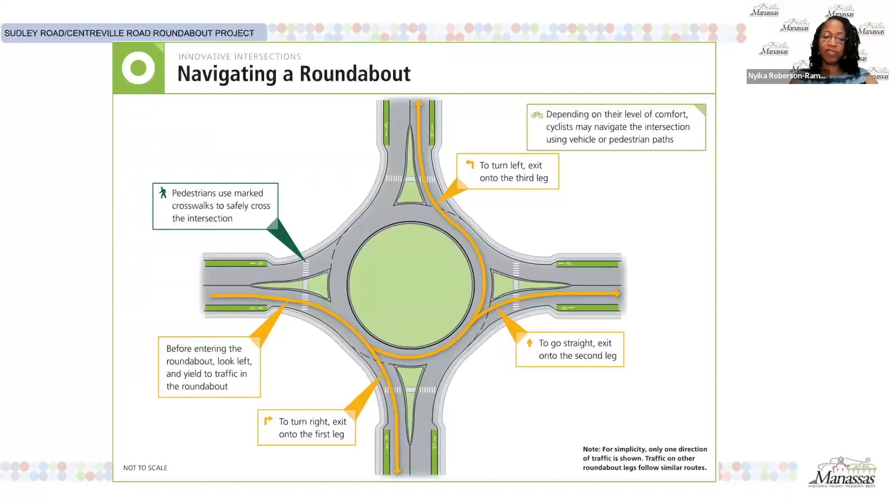First, what is a roundabout? A roundabout is a circular, unsignalized intersection where traffic moves counterclockwise around the central island. This means fewer stops and delays, safer speeds, and safer pedestrian access.

This roundabout was first proposed in the original Mathis Corridor Sector Plan adopted by City Council in 2006, which will reconstruct Mathis Avenue from Sudley Road to Liberia Avenue to a 2-lane facility with dedicated left turn lanes. After many incidents, accidents, and extensive traffic congestion, the city completed an extensive traffic study and feasibility analysis, which determined that a 2-lane roundabout would be the best improvement for the Sudley Road and Centreville Road Prescott Avenue intersection.

Roundabouts reduce the number of crashes and enable pedestrians to cross one direction of traffic at a time. Roundabouts are not dependent on electric stoplights, especially during a power outage, which makes roundabouts very resilient and efficient.

The proposed roundabout will also benefit the Mathis Avenue Improvement Project by increasing traffic capacity at the Sudley Road Centreville Road intersection.

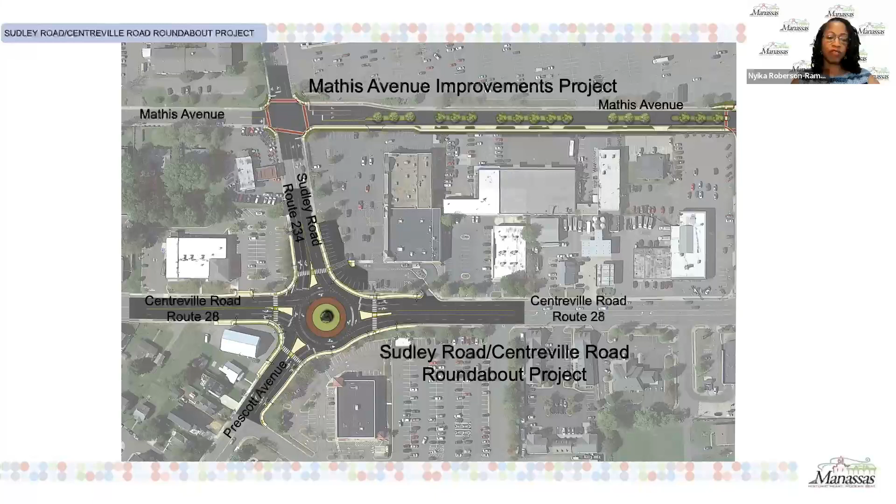The proposed roundabout is located at the Sudley Road Centreville Road intersection and will have 2 lanes in each direction, 6-foot wide sidewalks, pedestrian curb ramps, crosswalks with flashing beacons, and refuge islands at all 4 corners, and improved street lighting. Studies show that the proposed roundabout would get every vehicle through the intersection 30 seconds faster than the existing signalized intersection during peak hour travel times.

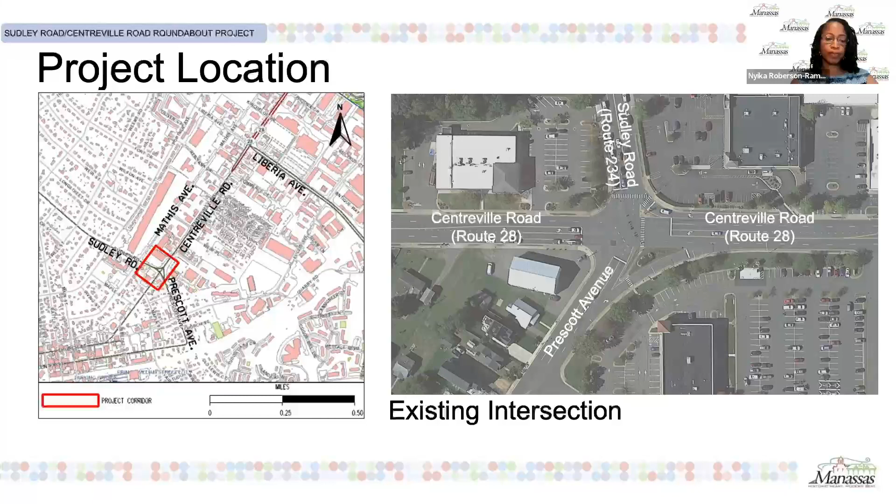This roundabout would be the first multi-lane roundabout in the city of Manassas and will be a hallmark gateway between the Mathis Avenue corridor and historic downtown.

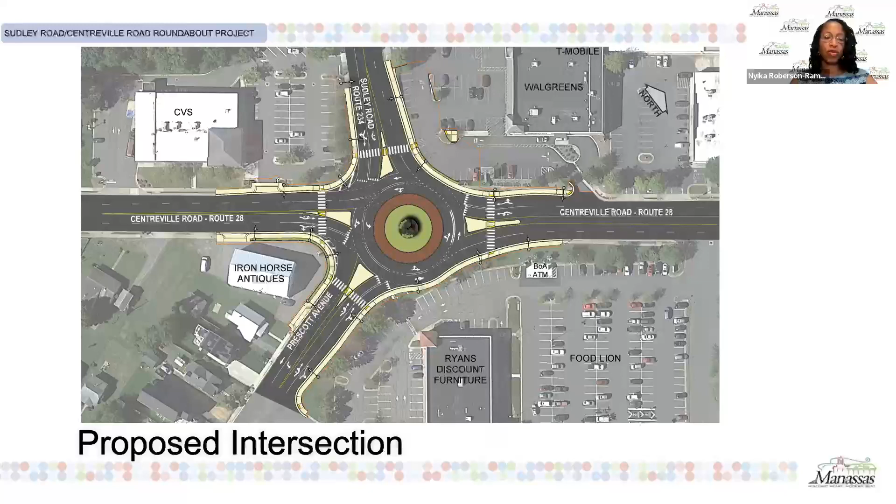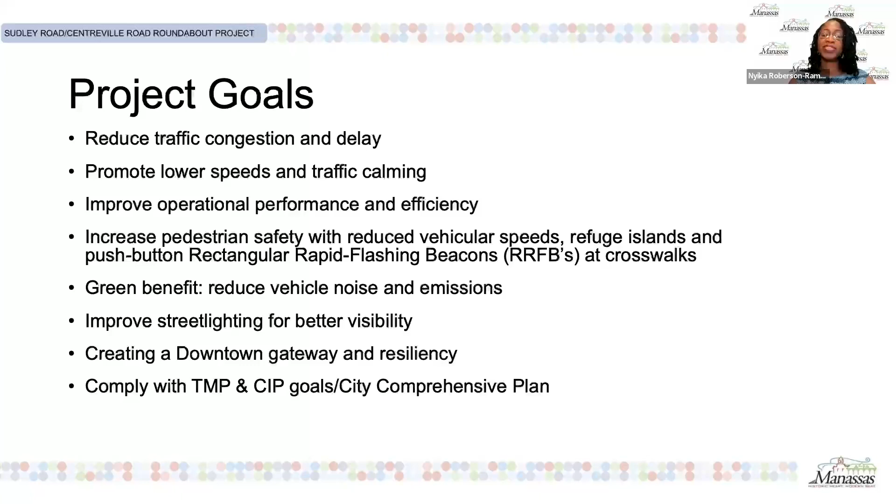Project goals are to reduce traffic congestion and delay, promote lower speeds and traffic calming, improve operational performance and efficiency, increase pedestrian safety with reduced vehicular speeds, refuge islands, and push-button rectangular rapid flashing beacons at crosswalks. Green benefits will reduce vehicle noise and emissions, improve street lighting for better visibility, and create a downtown gateway and resiliency, and also comply with the City of Manassas Transportation Master Plan and CIP goals per the City Comprehensive Plan.

Please know that if we stay with the existing signalized intersection, the mentioned benefits will never happen. The proposed roundabout will move traffic through the intersection faster and safer and is a far more superior improvement to Route 28.

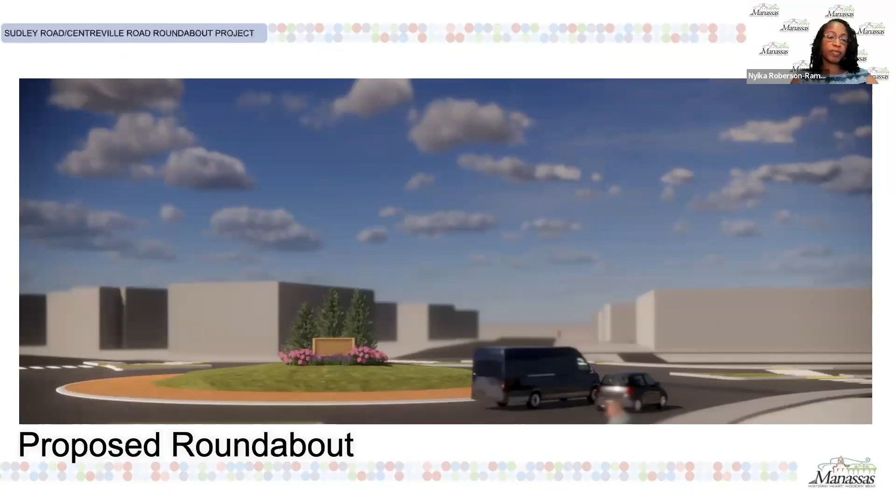First, I'll go over the environmental investigation and documentation. No hazardous materials were found at the site. There were also no impacts to wetlands or parks. And there are also no impacts to threatened or endangered species, and no historic properties will be affected by the project.

We've put together the draft environmental documentation, and once this receives federal funding, we will then need to produce a NEPA document, and it will be at the lowest level of NEPA documents, which is a programmatic categorical exclusion.

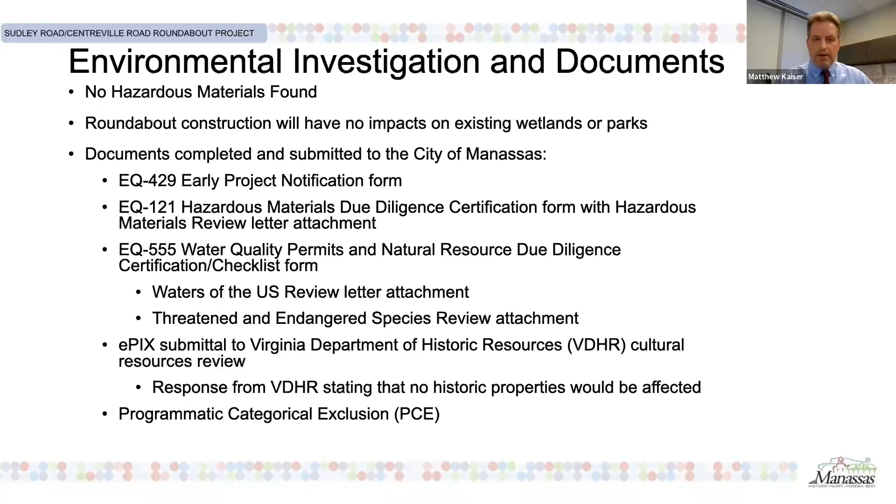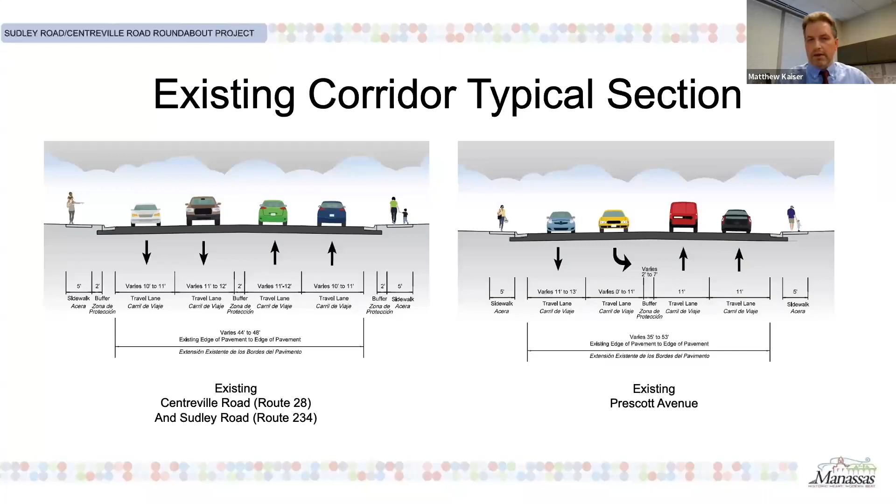This is the existing typical sections. We have Centreville Road and Sudley Road with 4-lane undivided roadway and central turn lanes. And then we have the existing Prescott with 2 lanes going eastbound, and then the left turn lane at the intersection, and 1 lane going right and through at westbound.

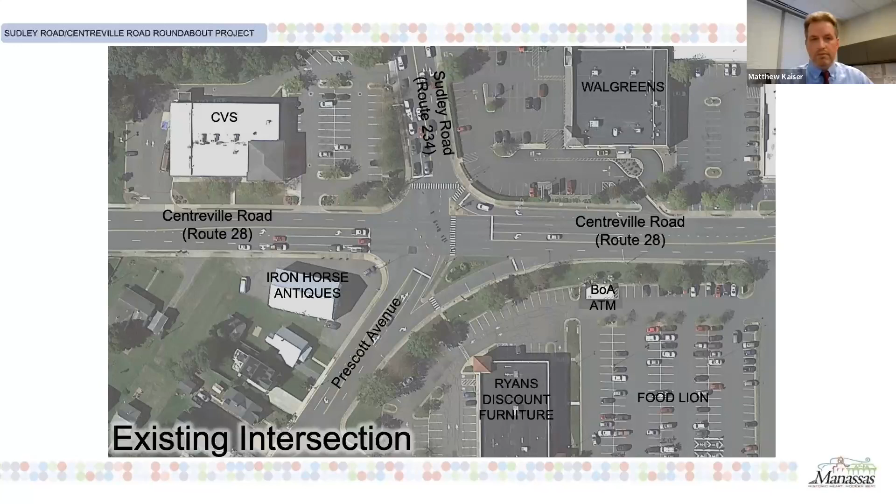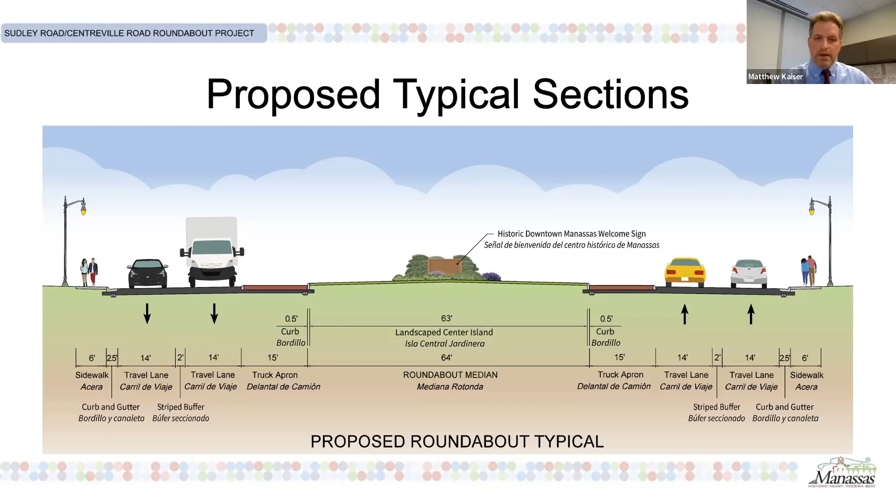This is the proposed typical section looking sliced through the roundabout. It includes street lighting, 6-foot curb abutted sidewalks, 14-foot travel lanes inside the roundabout separated by 2-foot pavement marking buffers, and a 15-foot truck apron for large trucks to navigate through the roundabout. It will also have a landscaped central island.

These are the proposed typical sections on the approaches to the roundabout, which will also have street lighting and 6-foot curb abutted sidewalks, 12 to 14-foot lanes separated by 2-foot pavement marking buffers, and variable splitter islands.

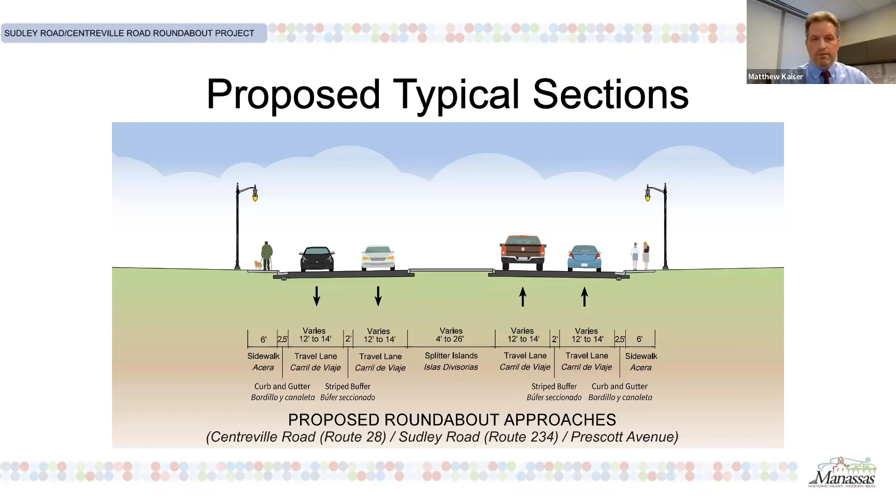All crosswalks will have rectangular rapid flashing beacons that can be activated by pedestrians to alert drivers that pedestrians are crossing. The roundabout also has 2 approach lanes in all directions and 2 exiting lanes in all directions, except at Prescott Avenue, which has just 1 lane.

This shows the relation of the Sudley Road, Centreville Road roundabout project to the Mathis Avenue improvement project, with the intersections separated by about 450 feet. It also shows in tan some of the new sidewalk improvements, not just at the roundabout project, but also along Mathis Avenue.

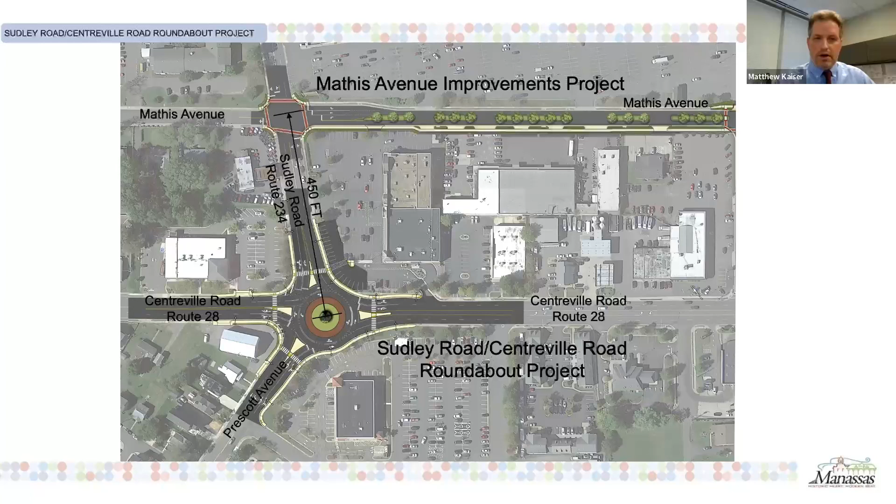This is the city truck route, and Sudley Road and Centreville Road are both part of that truck route, the western bypass to downtown. The current truck traffic is between 2 and 3.5%, and future truck traffic is expected to remain the same.

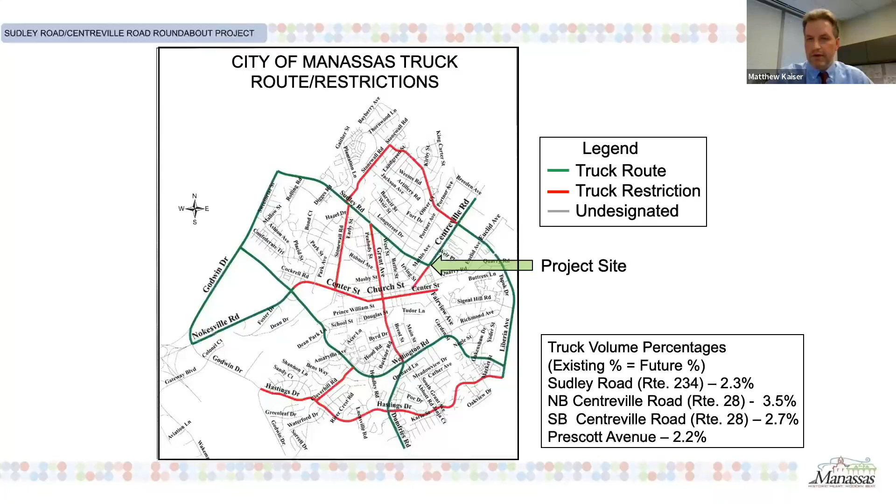This map shows the bike connectivity. Centreville Road and Sudley Road are actually not official bike routes. Bicyclists can use the roadways, but the official route to downtown Manassas is on Portner Avenue.

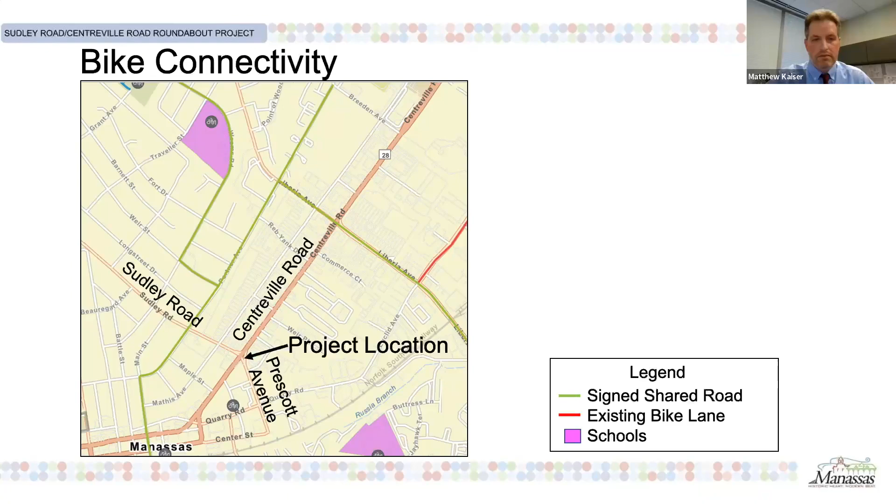I'll go over some of the roundabout design goals. This roundabout should improve the operational performance and increase pedestrian safety. We did a traffic study, and the level of service at the intersection should improve from the existing signal.

Currently, the level of service is a D for the signal, and it should go to a B for the proposed roundabout. The level of service is similar to grades you get in school, A being the best and F being the worst. Currently, the existing signal is at a D level.

The geometry, the splitter islands, and the central island will promote lower speeds and traffic calming. These percentages shown here are from Federal Highway for typical reductions in accidents: 35% reduction in all crashes, 76% reduction in injuries, 90% reduction in fatalities, 46% in pedestrian crashes, and 10% in bicycle crashes.

Again, with pedestrian safety, we're adding wider sidewalks, pedestrian curb ramps, marked crosswalks in all 4 legs, raised refuge islands for pedestrians, and flashing beacons in all quadrants. People will only need to cross one leg, or one direction, at a time.

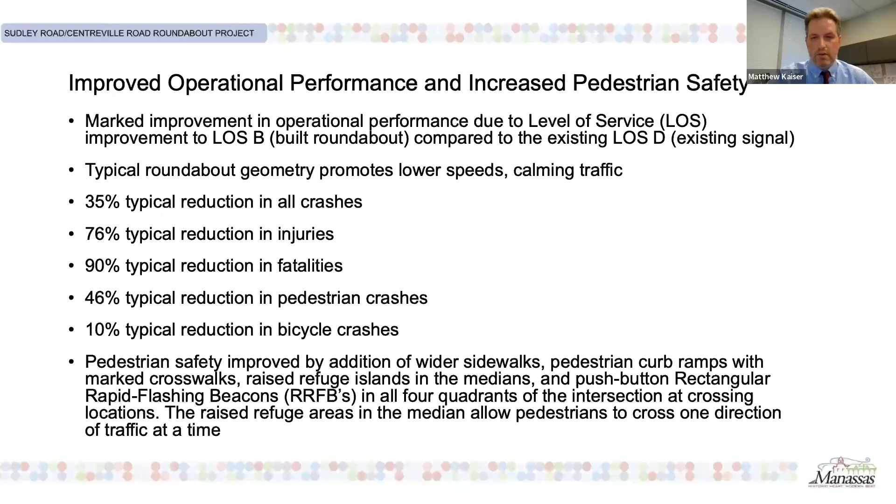We also have reductions in delays, congestion, noise, and emissions. The reduction in delays should be approximately 16,000 hours per year in the AM and PM peak hours. As Naika had mentioned, cars should experience a 30% or 30-second reduction in delay during peak hours.

We also have reduced delays, congestion, and noise from idling, accelerating, and decelerating vehicles as opposed to the existing signal. There's also a 40% typical reduction in greenhouse gas emissions from idling traffic. We looked at this roundabout using the Federal Highway Emissions Toolkit, and the reductions are equivalent to 550,000 fewer miles a year, or 25,000 gallons of gas a year.

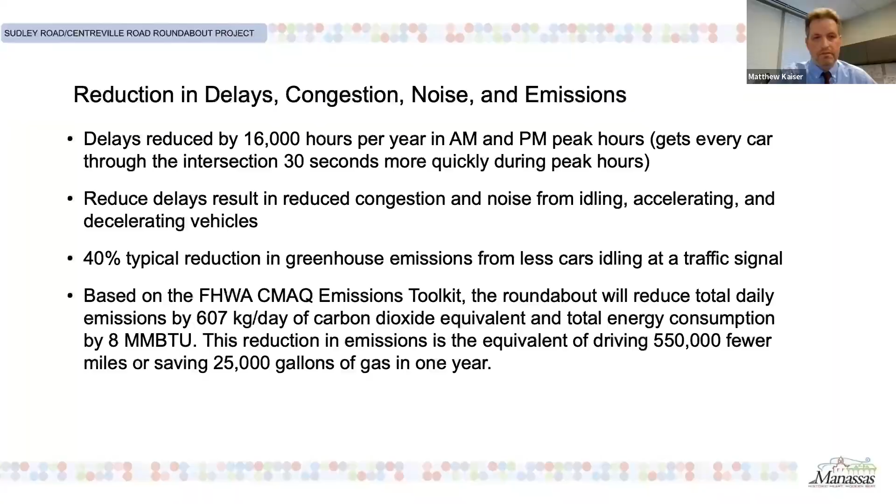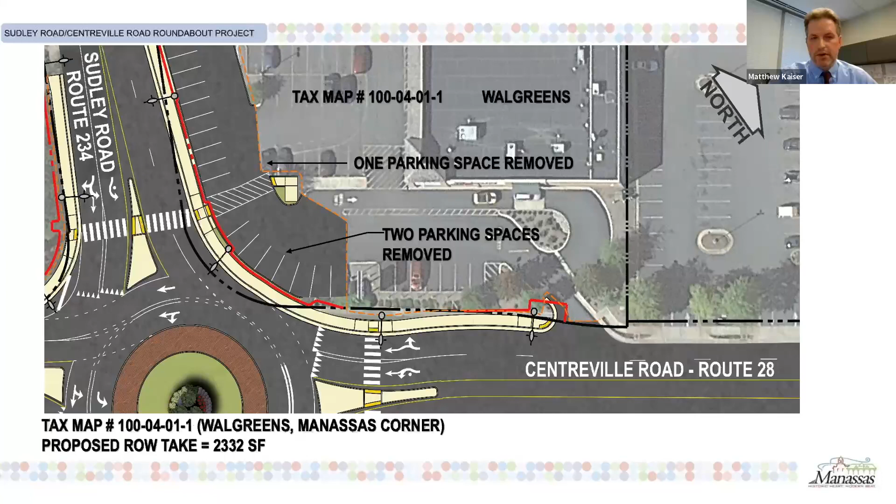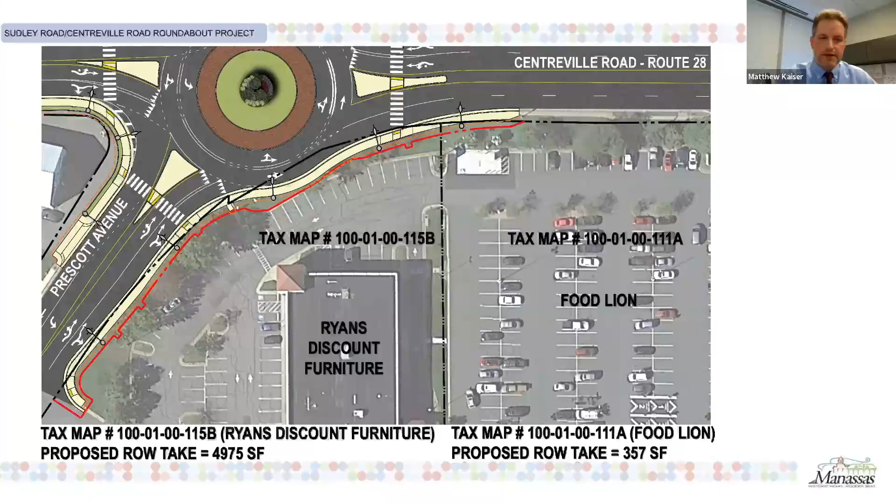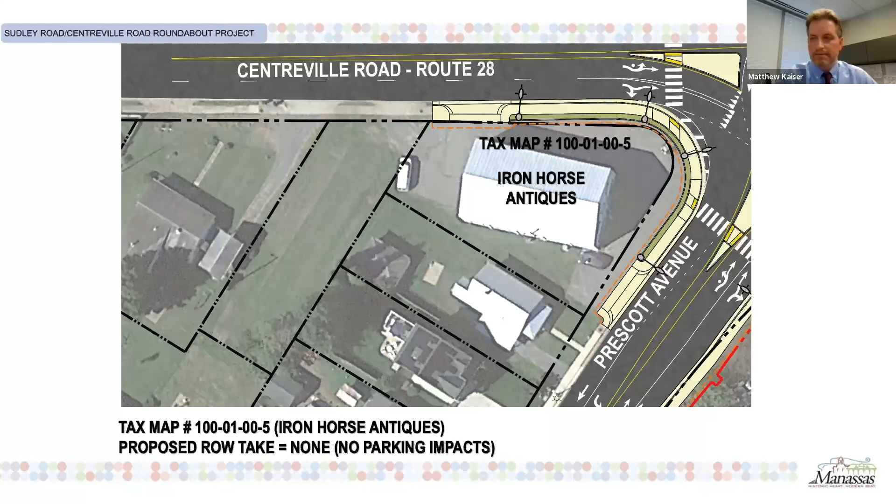In the corner with Ryan's Discount Furniture and the Food Lion, there'll actually be no impacts to the parking spaces, with some right-of-way needed. At the Iron Horse Antiques corner, we have no parking impacts and no right-of-way. And then at the CVS, we have no parking spaces needed to be removed and a little bit of right-of-way.

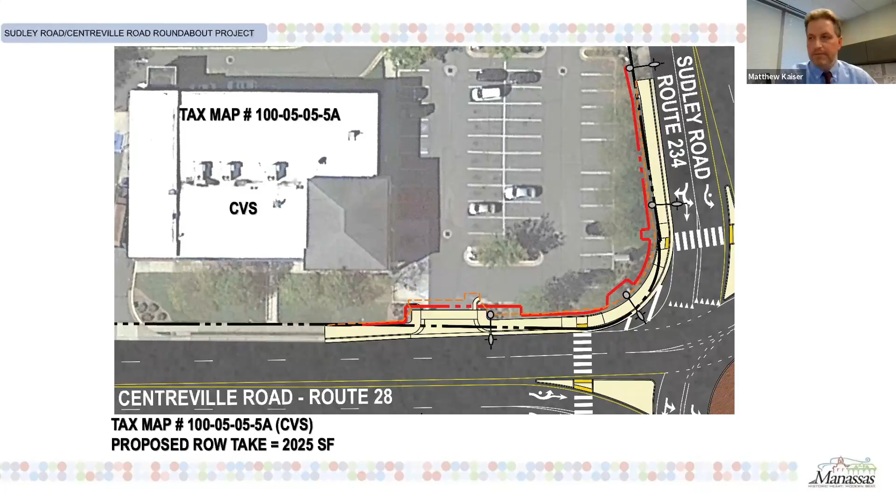Now I'll go through the construction phasing. This shows the 4 main phases for construction we'll use, and the approximate time frame for each phase. Phase 1, in light blue, is in the northwest and northeast corners, and will also include removal of the existing islands. Phase 2 will be in the southeast and southwest quadrants.

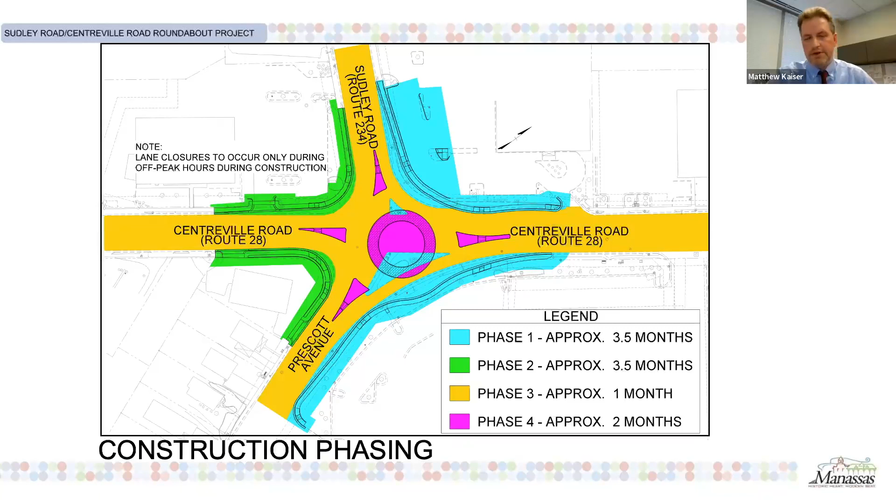Phase 3 will be resurfacing and full depth pavement reconstruction. Finally in phase 4, we'll install the splitter islands and the raised central island. It is during phase 4 that traffic will change from a signalized intersection to operate as a roundabout.

There'll also be guide signs installed as part of this. You're expected to yield to pedestrians in the crosswalks and yield to bicyclists that are using the roundabout as a vehicle.

Any trucks in the roundabout, you will not want to pass. It will operate very similar to other roads as far as emergency vehicles, with the fire station down the road - you'll want to get to the right and allow emergency vehicles to pass.

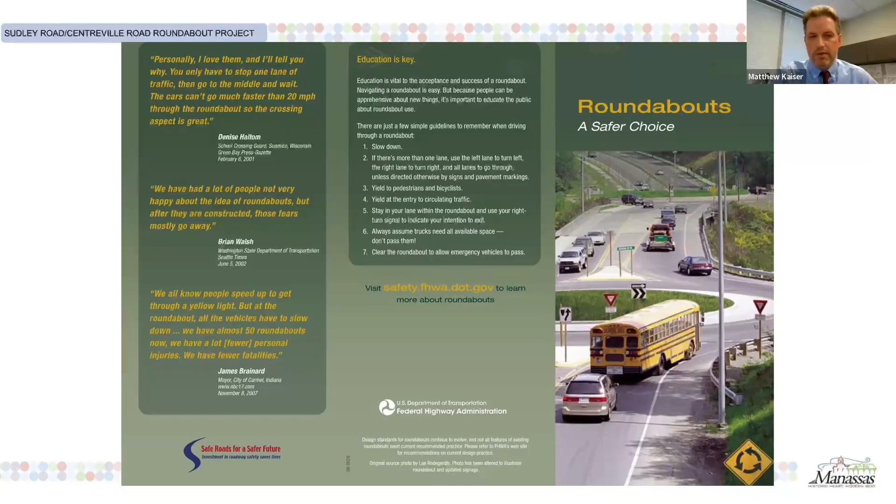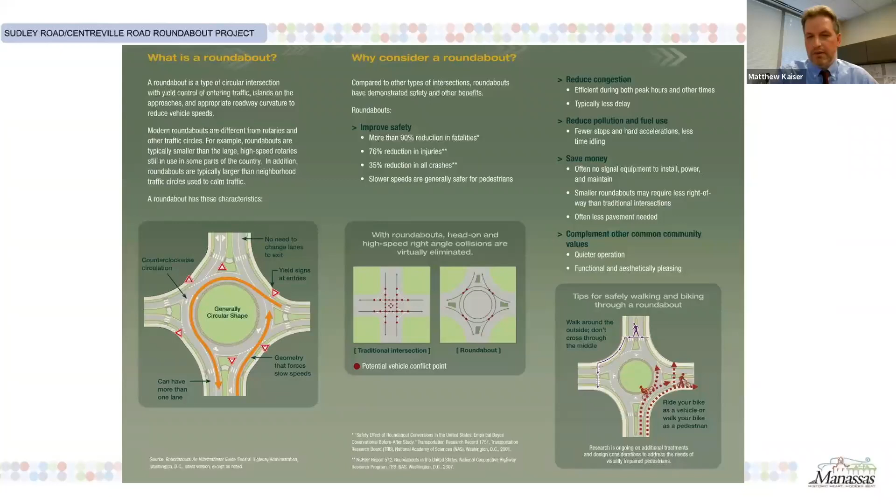Finally, on the lower right, it shows how bicyclists will go through the roundabout. They can either go as a vehicle on the roadway for the more experienced bicyclist, or for the less experienced, they can dismount from their bike and act as a pedestrian on the sidewalks and crosswalks.

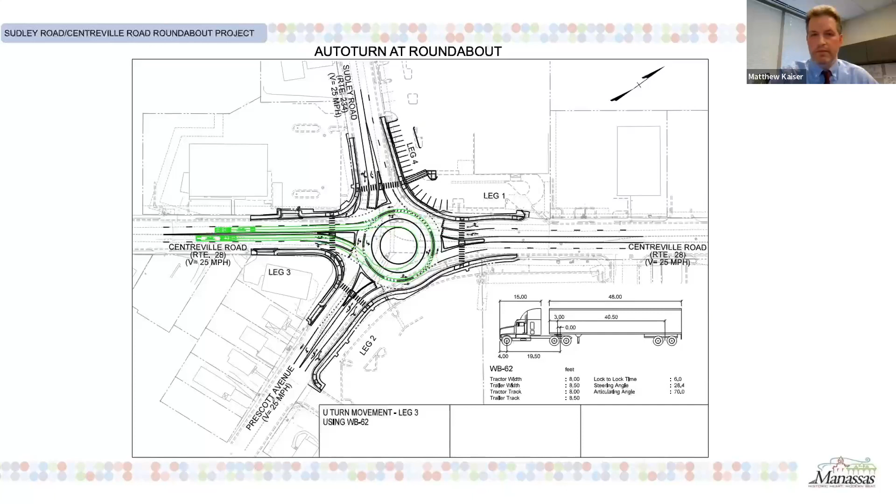This is the Centreville Road southbound U-turn, the Prescott Avenue U-turn, the Centreville Road northbound U-turn, and the Sudley Road U-turn.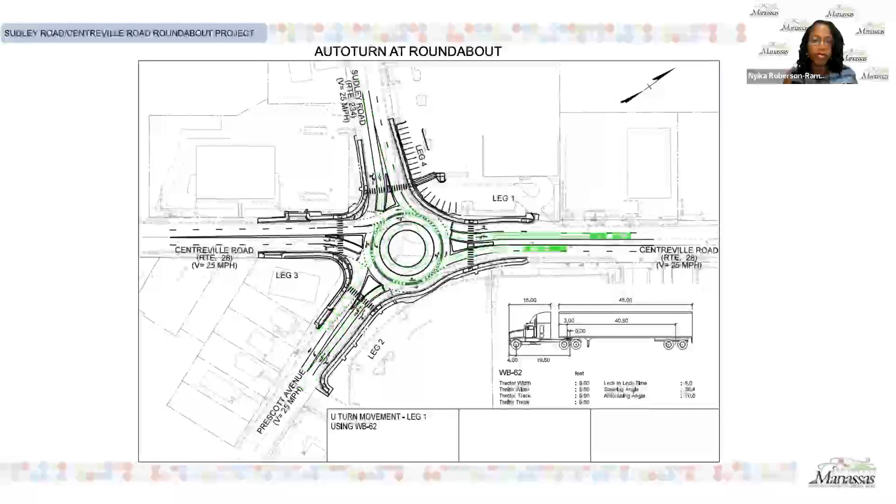Also, I don't know if we can go back to the typical section or not, but we also included buffer space. We have 2-foot pavement marking buffers. We could show that on the plan view, that would probably show it better.

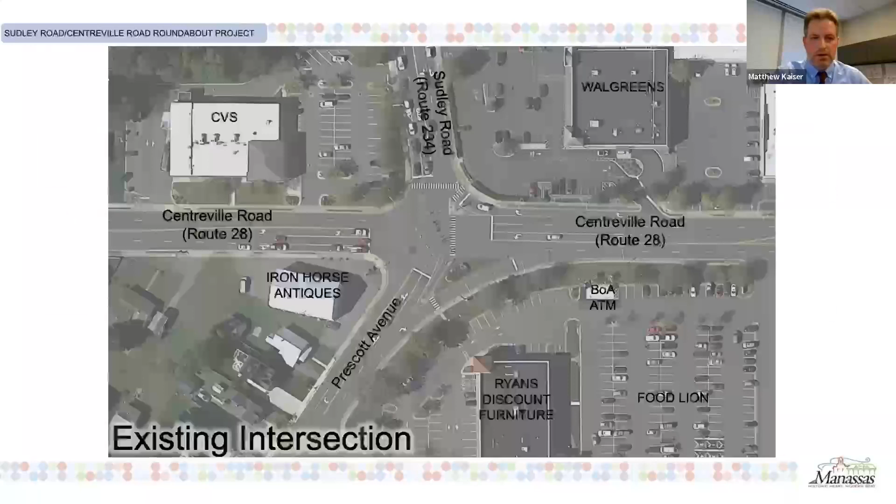So in the central island, on the approach lanes, you can see 2 approach lanes, and you see a buffer there between each lane. That's a 2-foot buffer. Then you see the small triangles, the shark teeth for the yield. Also in the roundabout, the solid white lines are buffers too, and there'll be pavement markings to help guide everybody through the roundabout. I know that's a big concern with multi-lane roundabouts, making sure everybody is in the correct lane. As they navigate through the roundabout, the pavement markings will help tremendously.

Thank you, Matt. Okay, 30 seconds quicker. To do what? Sit still and have to wait at the light on Liberia?

So the roundabout location is at the Sudley Road, Centreville Road, Prescott Avenue intersection. With this, you have a network right now. Once this roundabout is installed, the signal to the north will still be Liberia and Centreville Road, but you can go from there all the way into downtown Manassas without a signal. I think the first signal southbound is at Main Street, and northbound there's a signal at Main Street, and also another one at Center where it turns, but that one's green most of the time. So anybody living locally, within a half mile, will have to stop a lot less and sit at this light a lot less than they do today.

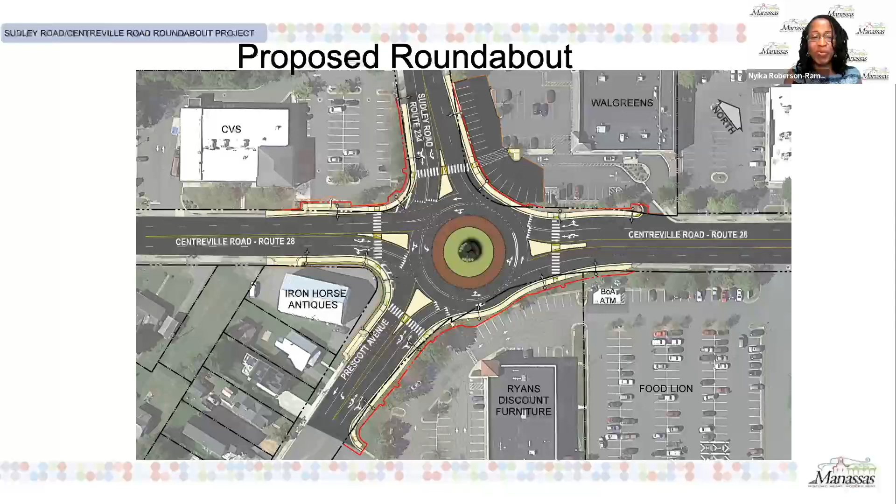Do you want to mention the in-person meeting on the 28th, Nyika? Yes, indeed. On July 28th, we will also have the same Sudley Road Roundabout project meeting in person at 5:30 p.m. at the Prince William Islamic Center. I believe it's at 9021 Mathis Avenue. I should have had it handy, I'm sorry, but we will post this information online as well.

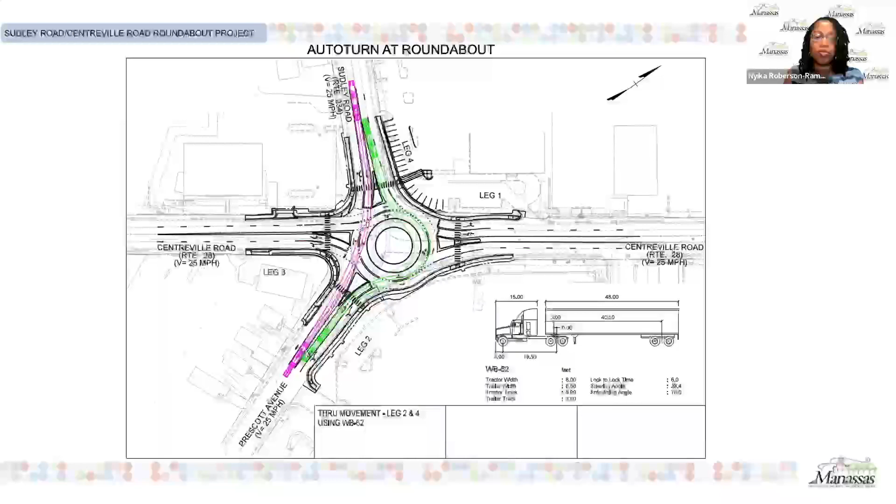Let me see if there's any more information on this page. At this meeting, you'll have an opportunity to ask questions as well and hear responses from us. Oh, I'm sorry, I'm not able to go backwards. I was trying to go to the last page of the presentation, so I'm sorry about that.

Oh, I think Lance has it here. It's 9002 Mathis Avenue is the address. Okay, thank you very much. So once again, yes, we'll have our in-person meeting on July 28th, beginning at 5:30 p.m. at 9002 Mathis Avenue, the Islamic Center. We're happy to discuss the project with you and answer any of your questions at that time.

Once again, this presentation will be posted to the city website at this link right here, and we'll also have responses to all of your questions, including ones that were not answered this evening, online within the next 2 weeks. There's also lots of project information, typical sections and schematics that you can view as well, and a lot of great project information.

Okay, I'll see if we have any other questions. Okay.